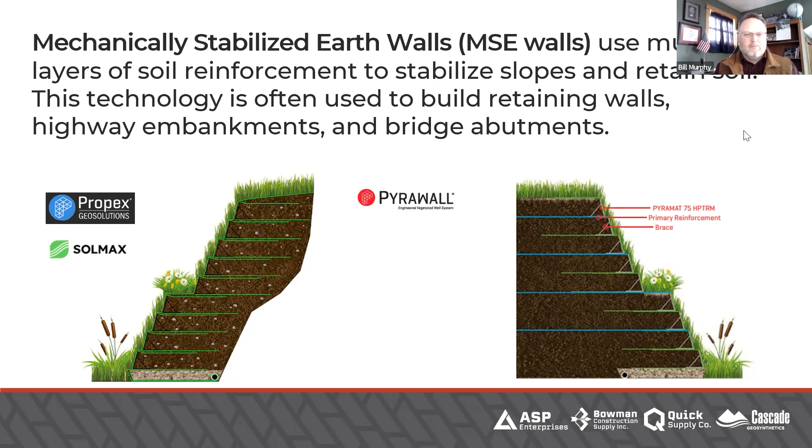If you would have told them about these, a lot of them might have laughed at you and thought it wouldn't stand a chance. But now we find that the way technology has evolved, and some of these manufacturers have invested a lot of time, money, and research, that we can do a lot greater things than we ever used to do just by hand.

So with that, Travis, I think I'll give controls to you. We'll start off with the picture on the left. We're talking about the Flex MSE vegetated wall system. You can see the small bags on the left side that we're using are built in around in-place landscape features, utilizing the natural resources that we have to get a look that we want.

The components for the system: we've got the geosynthetic bag itself, the plates, and the geogrid, and that's from, we can see on the diagram or the detail.

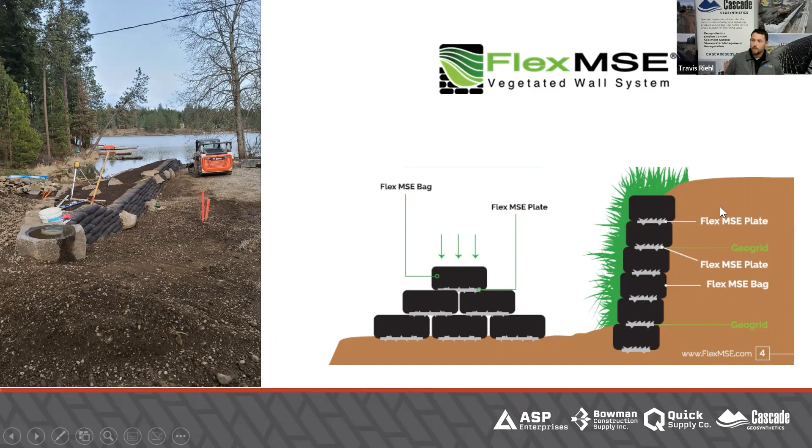And here we've got another Flex MSE feature on the Kalama House project. There was a lot of grade separation issues on this where we had to utilize these products to basically get our slopes up and make the land more usable.

That's the benefit of all the systems we're going to discuss today: the grade separation and getting our land and space actually usable, because you can only play with the kids on a slope so long before everyone falls to the bottom.

One of the manufacturers talks about having walls that are categorized as MSE walls, but they're not just standard MSE walls. These wrap face solutions are very popular. They typically are vegetated, but not always.

This one will have concrete panels in front of it. Well, now those are not necessarily graffiti resistant, but that's not our issue. This was just a good example of the burrito wrap stack wall.

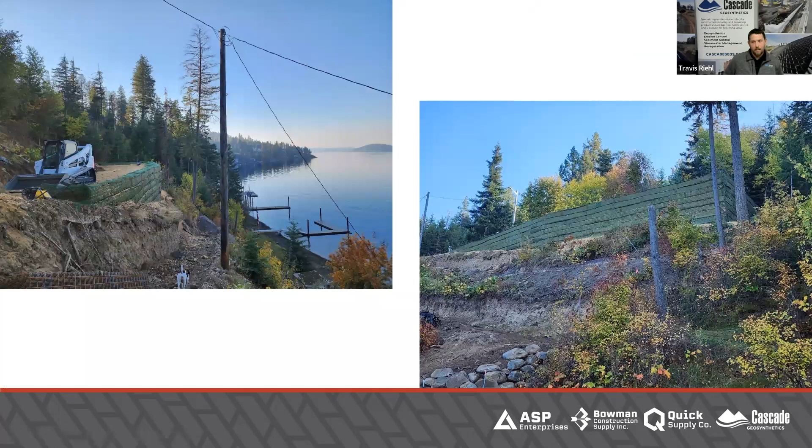So what we've got here is going to be a Miramesh face. So that is the long-term UV resistant facing fabric that you were just talking about, used with wire baskets.

The specific constraints on this project was obviously the beautiful location that it's in. They did not want to add any unnecessary grays to the landscape. So they utilized the Miramesh with the plan of vegetating it, but they were able to save time and labor by using the baskets and the geogrid on the access to the project. To try to get in with boulders or blocks would have been a very difficult journey.

So the contractor used these baskets and got the green wall put up in a timely manner, and now this owner's got a nice stable platform above their house.

Now, knowing that our viewers are all the way across the Midwest and the Rockies out to the Pacific Northwest, this doesn't look like Iowa to me. Where is this located? This is in northern Idaho.

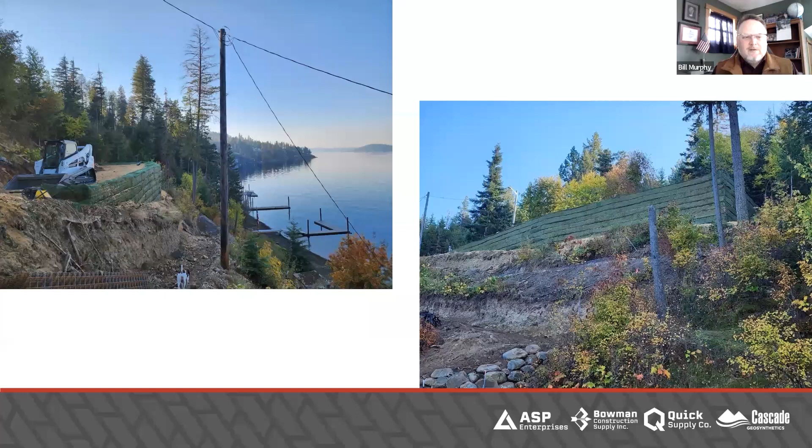Nice, Hayden Lake. Here we've got the Presto Geo's GeoWeb retaining wall system, and this is the Rainier Riverwalk project on the Columbia River in Oregon.

The contractor that installed this had already done a previous few projects with the Presto system, and they knew they liked it. They showed the owner on another phase of this project, and the owner loved it. They loved the ease, the accessibility to get these in and build these small scour protection bridge abutment features.

There's going to be a pedestrian bridge across that. It does look like a bridge abutment. It's been on my to-do list to get back and take a follow-up picture after they set the structure, but it's a good example of utilizing a green system in a green environment where mobility and access is going to be difficult.

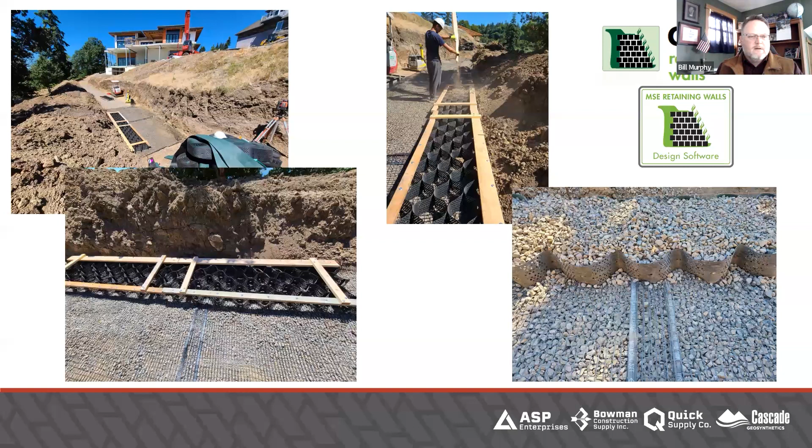Same project, further up from the previous photo. Each one of those cells is 6 inches tall, so you can quickly add those up and see the elevation that this homeowner was able to accomplish, making this unusable slope a usable area.

Now, rumor has it there's going to be an infinity edge pool put on top of this. Wow, we'll see the future photos of that one someday. I look forward to visiting this site with you someday. Definitely, summertime - there you go.

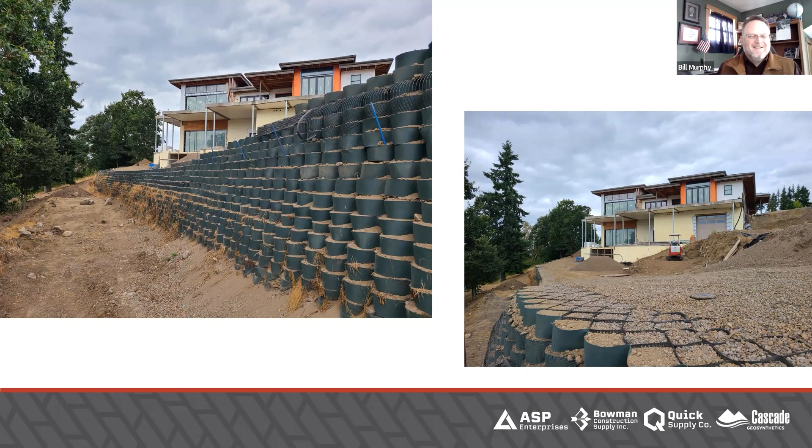All right, moving on. This is one where they did not purposely spread seed or anything on it - I could not think of the term I was looking for, just the blown-in vegetation that naturally occurred there. They were able to achieve what they wanted, which was making the wall disappear into a native-scape.

I showed some on the right that Presto Geo has on their website, where they intentionally vegetated it, showing the potential of what you can do with this system. What you're seeing on the left, the homeowner - it just happened from being in place for so long. They may go back and intentionally vegetate it with something native, but they could just leave it as is.

There is a plan to go back and plug-plant into the face of those cells, and that's leaving the 1 inch offset over each panel on the way up - it's going to leave room to get whatever landscape they want in there. There you go, to the homeowners and landscape architects.

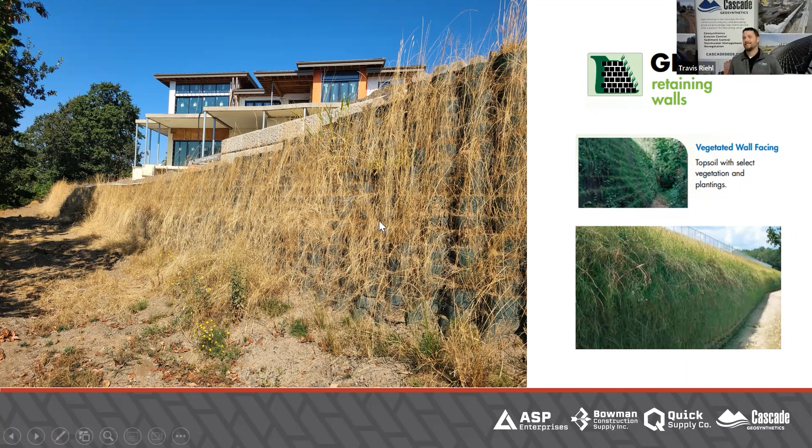What awesome vision. Did the homeowner hire someone to design the wall layout? No, just made it up as they went. Oh my gosh, that's incredible. There are people who pay a lot of money to have a wall look like this, especially how they worked in harmony with the boulder and the natural landscape. I love it.

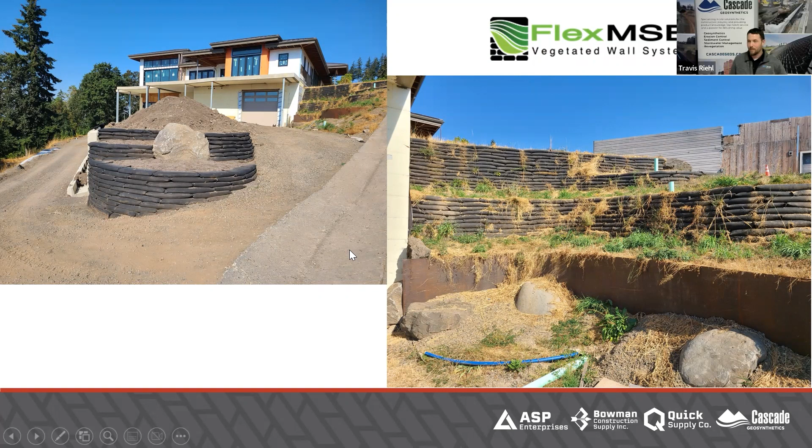Wow. Mine's ahead of you, I don't have the delay, so I get to say wow before you see your picture. I know, I was like, which one's next?

Here we've got another example of the Flex MSE system being used with the natural resources they have around Coeur d'Alene. The builder used this because of the access, which you can't see in any of the photos. This is lakefront property with a 1-to-1 slope about 400 feet above them, so they built a chute and were sliding the bags down to get them in place to stack them. So they filled them up above and then lowered them down already filled?

Yes, and then they were able to place it and use the stone steps and build this access right into the wall. It's going to be a great one when they go back and hydro seed it from a boat this year. From a boat? Yeah. In 2023 - I've never seen hydro seeding from a boat, that's fantastic. We'll save it for the next webinar.

There you go. Hey, I'll take over on this slide because I want to check the Q&A real quick. Joel Kennedy from Trexiana was talking about it being designed to create a seamless transition, and Joel is ready to meet with us, with you, with anybody to discuss projects, whether virtually or in person.

And our friend Norman said sedum cuttings would be awesome for that home where they're going to vegetate that wall. That's another popular thing, that a lot of these solutions work in harmony with native plants.

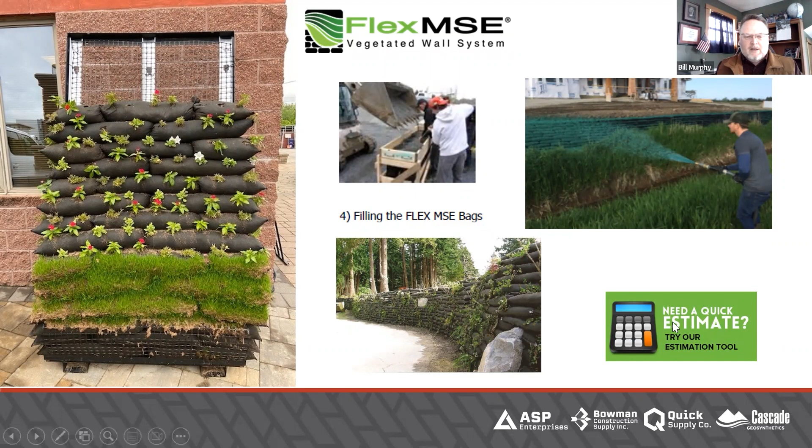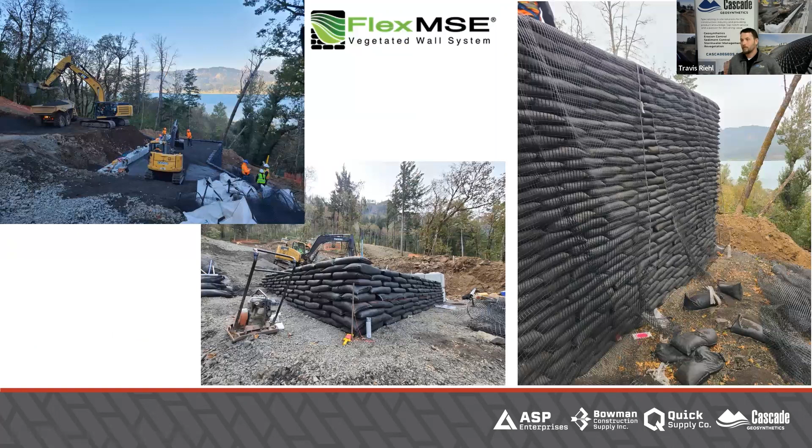All right, here we have the Mosquito Creek debris project up in the historic Columbia Gorge here in Oregon. This is an emergency repair to divert some landslide issues that we've had from some forest fires in the past couple of years. The Flex MSE was chosen for the visual from the highway—you can't see it from here, but this little chunk of wall is viewable from the highway—and they wanted to make sure they could turn it green at the end of the project.

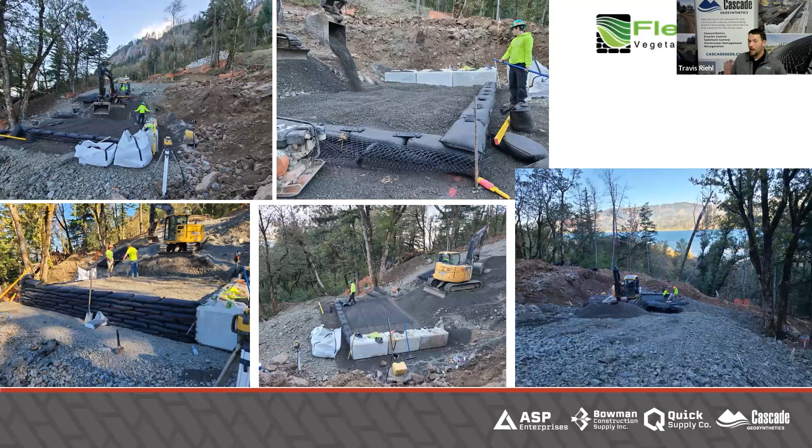I'll have a couple more pictures of the other side to understand a little bit further the construction constraints on this one. It was incredibly steep access, built on a 1-to-1 slope with a very hardworking crew that got this thing done.

You can see the ultra block walls down on the bottom. The large concrete block was used on the uphill side as an impact zone for any future landslides, to divert the flow into some basins. Everything visual is going to be the Flex MSE system.

I love it, it's so cool. I want to talk to you more about it. For the sake of time, I don't want to ruin your momentum. You're doing great.

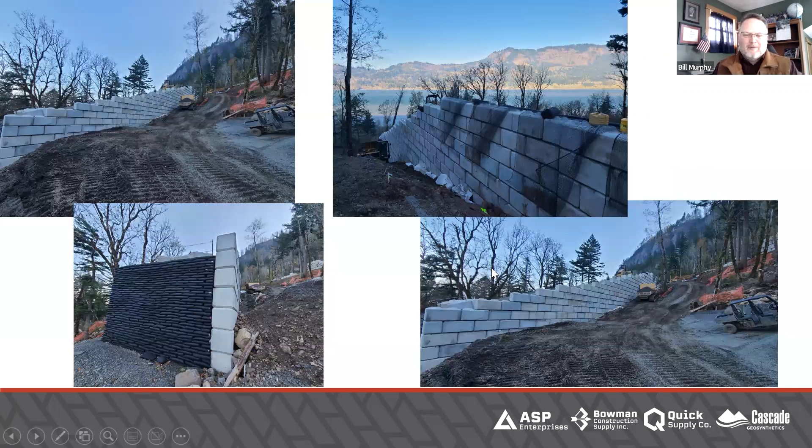So here's a couple different angles of this thing from the block side looking out. It's 22 feet tall by, I think, 300 or 400 feet long, with multiple angles. It was a challenging project, and these pictures will never do it justice. This is worth the hike to go look at.

Well, we didn't want to go too fast here, because we want to end with this project. So I wanted you to keep going. I think we'll probably back up and go to a couple others to get a little more in detail. But there's a video after this slide, I just want to warn you, so you could talk through this slide before the video.

This is just a recent picture from... let's see, I gotta move my toolbar here, it's blocking my photos.

The top left photo is looking uphill, looking at the angle they were able to divert this wall to build a ramp to get up there. What you see on the left photo and the right photo is, above the left photo is where the right photo begins. So this long wall is a ramp access point for these guys to get up there, to run heavy equipment on, to get their 40,000 pound excavators up this ramp safely during post-emergency to clear any debris and do the work that the DOT needs to do.

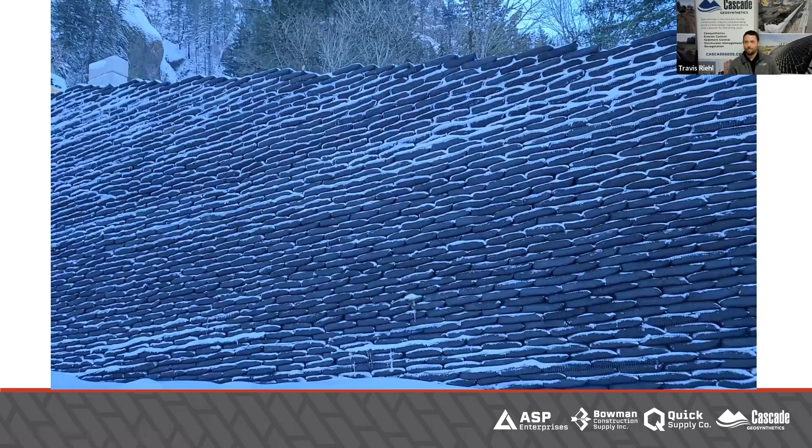That's amazing. Again, this thing will be sprayed with Flexterra and a native seed blend to vegetate it over the next, probably this spring. So I'll be looking forward to some follow-ups on this one.

Now, how are they going to get to this one to spray the Flexterra? It looks like a boat couldn't reach it, and you can't reach it from just above ground, so how are you going to get to it? This contractor will be loading their hydroseeder in the Morooka, I believe, and tracking it up the access way to get it into place and get it seeded.

That's incredible, well hats off to this contractor. I don't know if you plugged the engineer or the contractor, we usually don't do that, but you sure could. I mean, this is one of the most impressive MSE projects I've ever seen, or projects in general, period.

Now, the engineer, the owners, the reps, the contractors were all phenomenal on site all the time, getting it done. Part of our requirements was to be on site for a good chunk of the job, and it was worthwhile. There was a lot of experience, a lot of good lessons learned, and on to the next one.

In all seriousness, I was going to make a joke, but I can't because this is an area where there was a landslide and there's been wildfires. Our company has been involved with reclamation projects for post-wildfire sites, whether with biosol, profile products, or muscle wall for debris flow to protect properties. Landslides are a very serious thing, wildfires are a very serious thing.

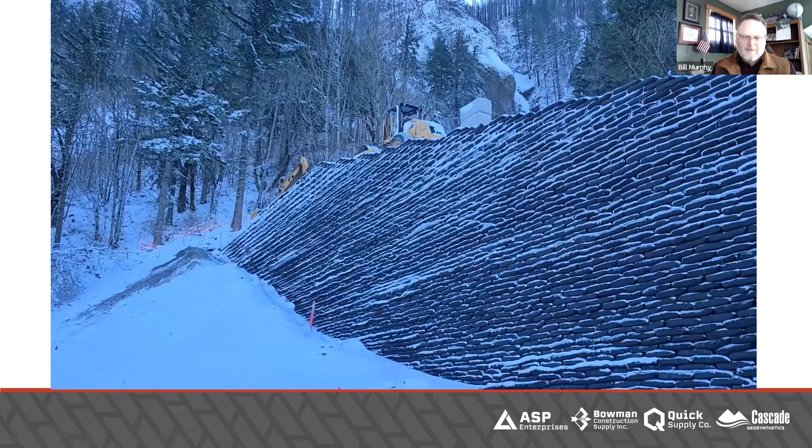Can you back up and show us anything that might give an indication of where you came up with the solution to use super sacks with pre-filled bags to get them down to this project? That was pretty impressive. You'll have to keep going back, it looks like. You're doing your video again. I know, the delay is throwing me off. So here, I'll take over, I'll drive.

It's absolutely incredible, because that's one of the things they don't teach you in college. There's a whole lot you learn as you go. We like to partner with the owners, the engineers, and the contractors, and whoever's going to be responsible down the road for maintenance. That's one of the ways we add value as a site solutions provider.

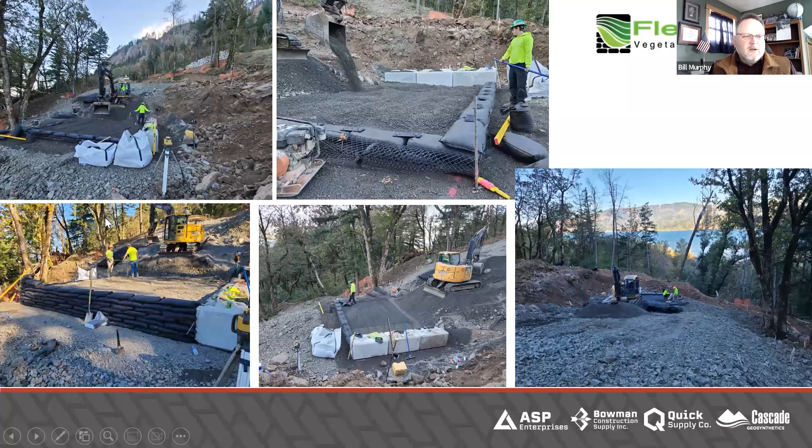You were going to talk about one of those previous pictures that had the image of the two different geosynthetics. I'm going to go ahead and do that since we have time and I have the controls. Hang on, everybody, I don't want you to get motion sickness. There was a picture back here, Travis, that you said caught your eye, connecting back to the geosynthetics webinar Melissa and I did in December, where geosynthetics are your friend, not the enemy. What do you see in this picture up on the left?

So when they were cutting out for this access road to put the retaining wall in, we went down to the original fabric from the haul roads they put in a couple of years ago, and you can see the separation layer actually still functioning between the native and the rock fill in the top left corner. And then a second layer of fabric put over the new rock coming in there to build a stabilized base to get in there.

You're definitely seeing geosynthetics right there on top. Yeah, you're definitely the right person to be partnered with Melissa, because she bragged about the same thing in some of the pictures we had, where it was originally going to be, I think, maybe Stratavault. We were talking about a Stratavault project where she used the non-woven geotextile and the geogrid together. In this picture, it's an example of combi grid where she used it to wrap a Stratavault. But in the picture, you could see under the road section some of the old fabric, and Melissa was so pumped because she's like, that was probably an old Amoco fabric from decades ago. That's just so cool to see the separation layer and how that works. And it connects to this mechanically stabilized earth.

When people first learn about how geogrid or geotextiles work, they see those images. A lot of labs have done it, a lot of universities have done it, a lot of manufacturers have done it, where they have a little box frame, and they'll put the soil and the fabric and the soil and the fabric, and they'll stack them. Then they remove the frame and the guy stands on it. I saw one last night where they had a car parked on it. I've seen a lot of these cool examples, and it's only 1 foot by 1 foot, but it's these independent layers of mechanically stabilized earth that are stabilized with either a high strength geosynthetic or geogrid.

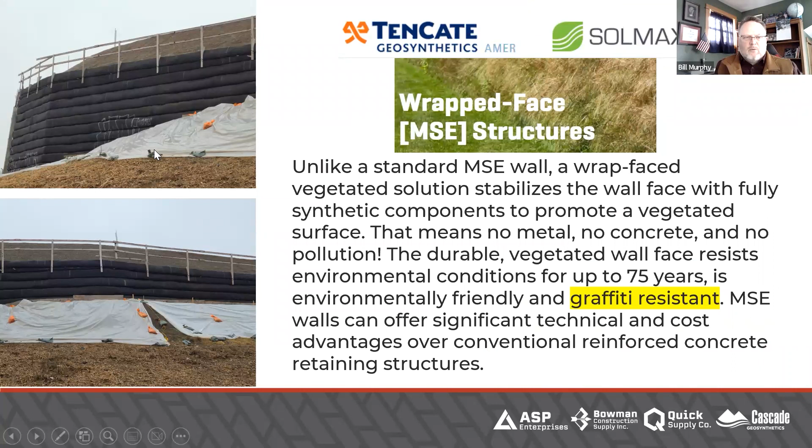And that's really the same concept that's happening here. On this particular picture, you have geogrid every third bag, every third row - some people do it every second row. Then on the very bottom of the Flex MSE, they wrap at least 2, maybe 2 or 3 layers with the geogrid, and it ties back in, so it's that reinforced earth. There's a lot of things working together, which you talked about, even on this project that had the wrap face wall, and this one under the highway. There's a number of different solutions that work together.

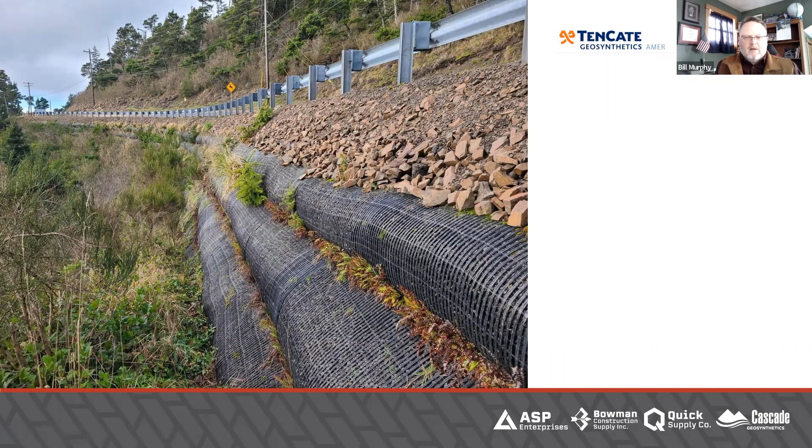We're blessed because we can represent a lot of different competing manufacturers that can all work on the same project. There's nothing better than to go out to a project and see 10 or 12 or 15 different solutions we provided, from BMPs, erosion control, sediment control, stormwater solutions, structural solutions, reinforced slopes. We didn't even get into all the different anchors that we carry. There's so many cool things that we can do that goes back to solving problems.

That's how Melissa opened our webinar a month ago: what's your problem, what are your challenges, what can we help you with? Our solutions aren't one size fits all. There's an endless set of ideas and products and value that can be brought to any project, small, large, residential homeowner, large commercial development. It's the ability—all the people we're fortunate enough to work with around here across the United States—have a vision. They have a toolbox that is very deep to find the answers and the solutions we need.

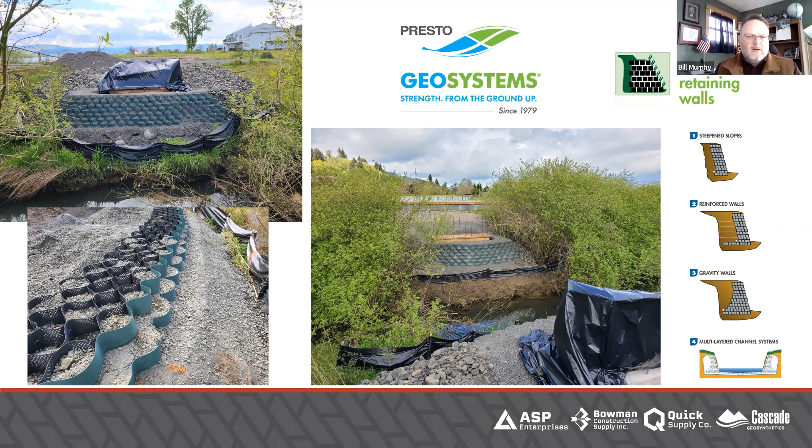Travis, you even have some pictures showing safety railings on, I think it was the big Broadmoor project. Do any of your projects have the permanent walls and railings in them? I know that Flex MSE has details that address that. Presto Geo does as well, and the Solmax companies as well. So how do you address that?

You can just describe the fall protection, but then for any permanent walls or permanent railings, how do you address those? There will be standard details for how they're going to do the permanent fall protection, and then bollards to keep vehicles from driving off at some point.

This temporary fall protection was very creative on how they got this done. They were still tying people off as well, so this is a secondary safety measure. They were able to link the rebar, tie these on at every interval, and elevate them on every second basket, and it worked out really well. And this was a reused product, reused from a demo project they did, so they could just pull those out when going up to the next level, build on top of it, and continue. That's great, that's excellent.

Because some of these walls are ridiculously high, which I would be concerned about with some of them if they're going to be in inhabited areas. But we have to agree that there are naturally occurring cliffs and steep slopes in nature that don't have railings on them. So at some point, if you get away from these civilized projects right in the middle of a city and go out to those in the mountains, there has to be some risk associated just from being out there to get to the site, right?

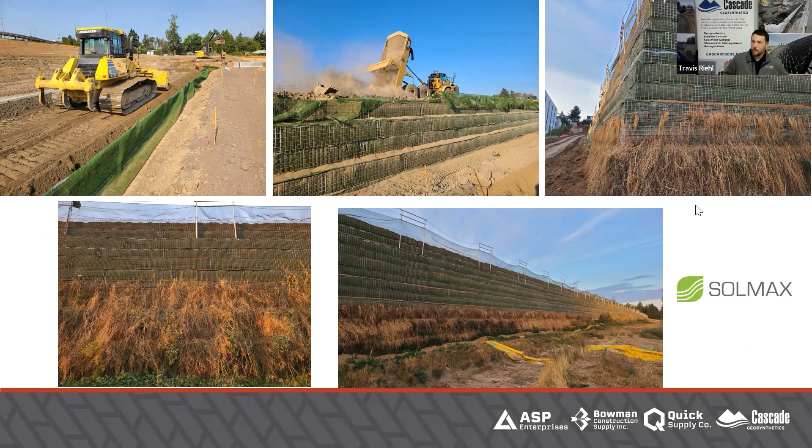Yeah, so we're not going to mitigate all of it, but there are permanent railings and there are details to put permanent railings above all of these walls, every single one of them. I was going to ask, because some manufacturers specifically show those details on their website. I don't think we included any details for permanent railings, but they definitely are available.

Yeah, they are. And I went back to Mosquito Creek in part because it's so beautiful. But one of the things I noticed when you were talking about access was this mini excavator coming right down to the site, and that top picture shows when you're very first starting this wall and they're compacting it in lifts. One of the things you and I talked about was how fast this system gets installed.

You don't have to string line every bag. In fact, the string on here is kind of a joke. You have a string line that you start with, but you didn't even have to use it as you worked your way up, did you? That's correct. The only thing we used was maintaining the vertical batter on the face of the wall, but otherwise the crew really got down the drop and flop method of getting these bags in place, maintaining the running bond, keeping all the small details of seams and plates correct, and extending the geogrid out just a little bit further to offer visual confirmation of geogrid embedment length on each layer. And I love that.

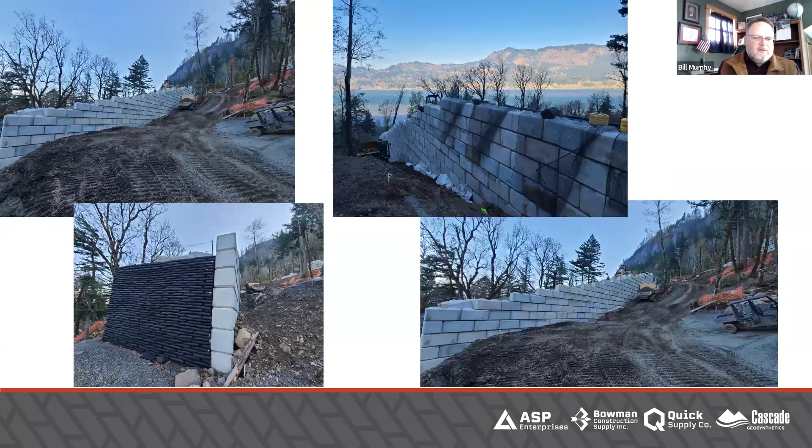Now, I wish I could have recorded a couple of the people out there that had to go back on their words after the first couple of days. They said, 'Oh, this is too much labor,' and then a couple days later, 'This is way easier.' I'm like, exactly. Oh yeah.

Exactly. Well, as we talked about the GRS, IBS, even up at the very top at the beginning, there's a lot of old school people that are against new technology. And I know that when those first started getting used years ago for bridge abutments, there was a lot of resistance to it. Where I'm at in the Midwest, there's a limestone rock quarry in every county.

So it's really easy to get concrete products here, really easy to get rock. But the more our industry evolves, we use rock. In fact, our parent company is huge in the mining industry, very important for road design and infrastructure design in general. But for a lot of what we do on erosion control, sediment control, and stormwater, there are a lot better options than just rock.

Now, granted, nothing beats a beautiful granite boulder wall that's naturally occurring. But if you go to some of these websites, in fact FlexMSE has it, they work in harmony with those boulders like you had in some of your earlier pictures that are just absolutely incredible.

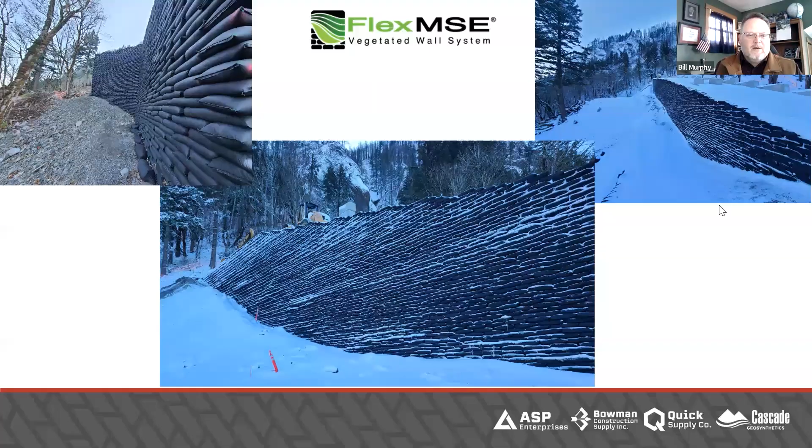I'm going to skip past your video here. Oh yeah, well I was going to get to the ending, but we have some time.

The summary I wanted to say is what Melissa started with last month was, what problem are you trying to solve? And Travis, that's where if they involve you early, you can really be a lot of help. You can come in late and just try to do exactly what they need, but if you can be part of the discussion, you get the opportunity to offer solutions, correct? That's correct, the earlier the better.

Yeah, earlier the better, and I say early and often. So one of the things I noticed with you is how willing you are, and apparently the contractor, to evolve as the project's happening. If you figure out some better ways to access the site or a different way to do it that's more efficient, that's the lessons learned that we try to capture.